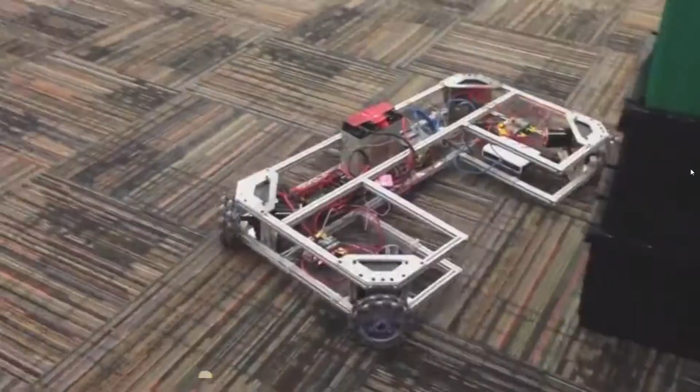If you just joined our series, we are creating this rolling robot chassis. Up next in this episode, we are going to convert these motor and wheel assemblies into a single SolidWorks part. Simplifying assemblies to parts can help our performance.

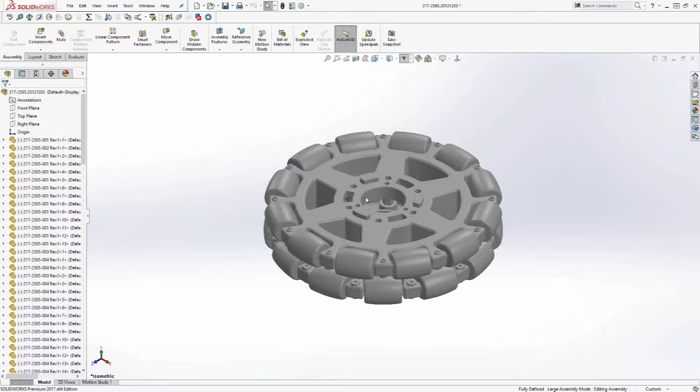The first thing I like to do is change my render style to shaded with edges. Next, I will box select the whole assembly and right-click on any part in the Feature Manager. Select Fix. This locks the parts in space. I prefer to add a little color to differentiate my components.

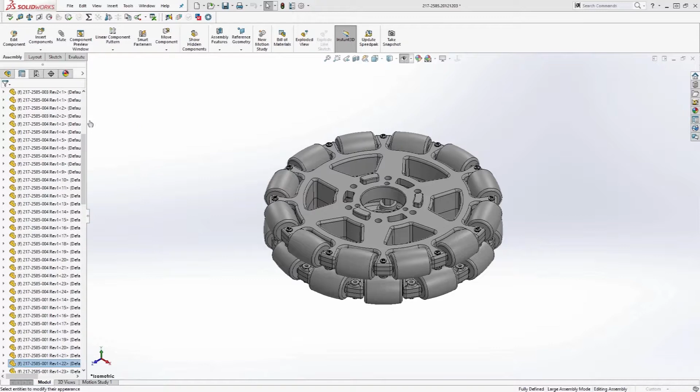I want the wheel rollers to appear black in the assembly. I can edit the appearance from the context menu, select a roller, and right-click the drop-down next to the color wheel. Click on the color swatch next to the part number. This launches the Appearance Manager. Select black from the color palette, and check the option Apply this at the part document level.

Now let's save the assembly as a single part. Click Save and select Part as the file type. Next, I want to import the motor. Following the previous workflow, I imported the motor. Now I just need to insert my Omni wheel part.

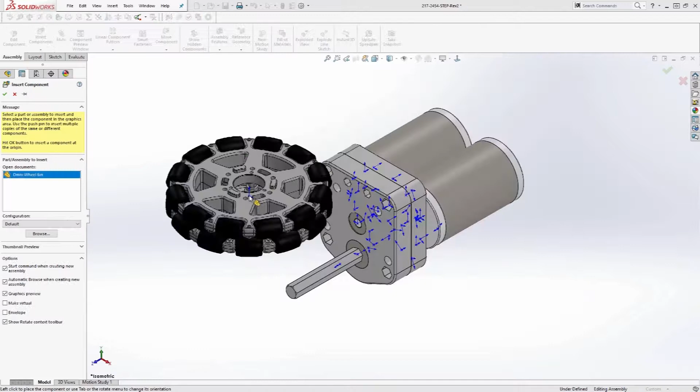I will add a concentric mate between the wheel hub and the axle, and apply a coincident mate to the hub and axle faces. I'm done with my mockup. Now I just need to save this as a part.

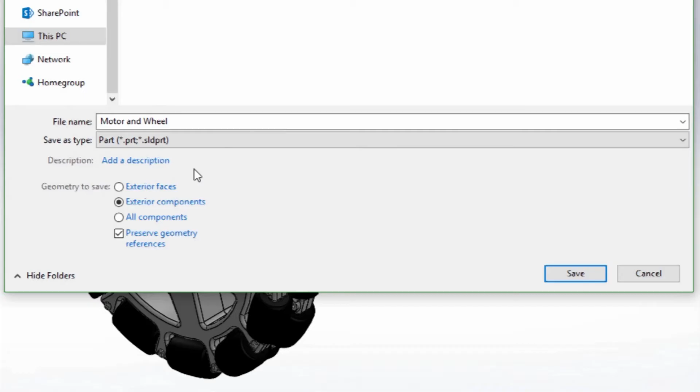Tip: to economize our file size, I use the option Geometry to Save, Exterior Components. This saves only the visible components and removes internal components. Using the option Preserve Geometry References will include all reference geometry as part of the file.

It's easy to create SolidWorks models from vendor designs. Saving assemblies as parts is a great way to improve assembly performance. Join me next time as we begin outlining our chassis. Using SolidWorks, our design comes to life for the first time.